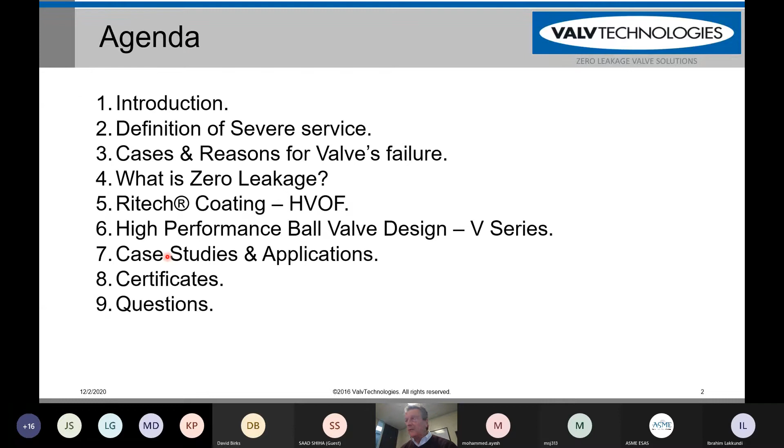You should be seeing the introduction of the agenda, where we're going to be talking about zero leakage and severe service applications, and give multiple examples, in particular on scraper traps and molecular sieve. We have many different applications that we use our valves for. So if you don't remember anything else from this presentation, remember this: ValvTechnologies manufactures only metal-to-metal seated valves.

We don't manufacture soft seated valves. We only manufacture valves that are used for severe service applications, 100% metal seated and 100% zero leakage, as defined by numerous specifications, which we will get into in just a moment.

So when I talk about severe service applications or critical service applications, what exactly are we talking about? Well, if you're producing oil, gas, and water, oftentimes off the lateral line from the wellhead, you will have a lot of sand or abrasive material inside the pipe that ends up impacting the valves. You can also have highly corrosive services.

If you have any H2S present and it's wet, that makes sulfuric acid, which is very corrosive. If you have CO2 and water, you make carbonic acid. That can also corrode the valves, corrode the pipe, and then the scale inside the pipe ends up going down line and can produce black oxide and other very severe service types of applications.

Also, when you get into very high temperatures, over 800 degrees C or down to cryogenic for liquefaction of methane gas down to -196, when you start getting into very high pressure applications like your API 6A 15,000 PSI or 15K valves. Also thermal shocks, when valves go through low temperatures up to high temperatures down to low temperatures with severe thermal fluctuations within a short period of time, say a minute or 2 minutes, this can make for very severe applications.

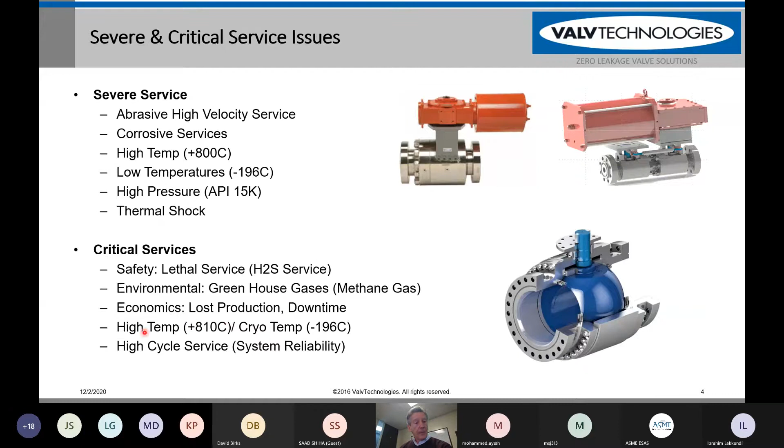If the valves have downtime, you lose your efficiency, you lose your production, you have labor costs, severe temperature swings, and of course, high cycle.

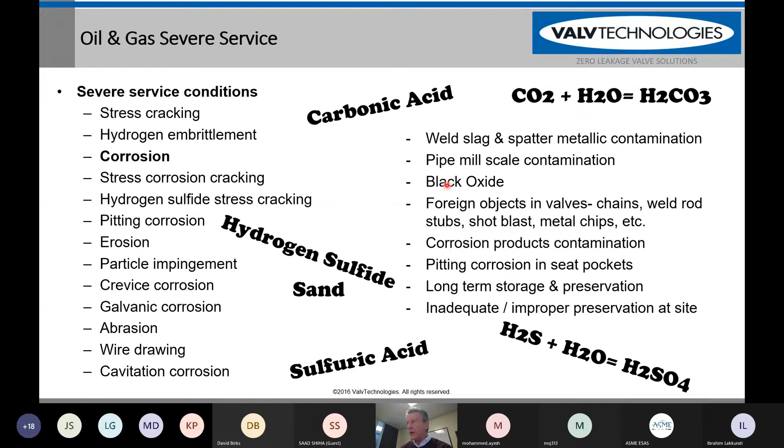So here's a couple of examples of severe service applications that you may be able to relate to. Corrosion, hydrogen embrittlement, abrasion, erosion. You end up getting weld slag splatter contamination, which goes down line and impacts the valves every time you open and close them. Black oxide can be very prevalent in many areas of the world and can be a real challenge for production. Let's take a look at a typical type of severe service application called erosion corrosion.

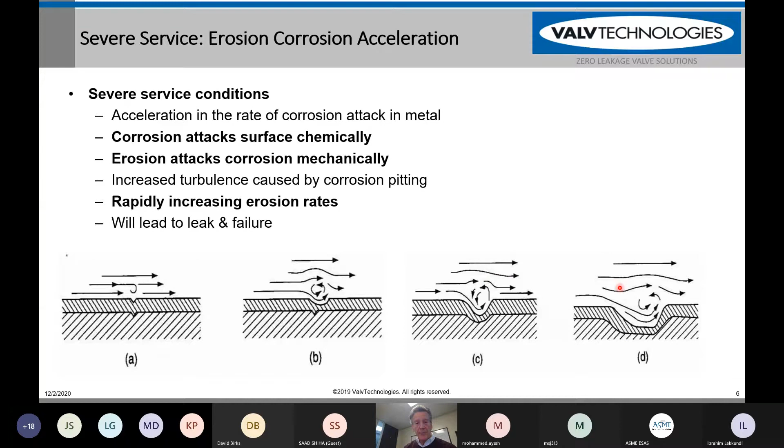Basically, if you have a material and a corrosive environment, the internals of the valve will start to rust and corrode. Then, coupled with that, you have abrasive service. The abrasive service continues to erode away the rust inside the valves and exposes the corrosion to new metal all the time. Over a period of time, this can greatly impact the valve, where you have corrosion and erosion happening at the same time, making for severe pitting in the valve.

When the valve is closed, if you have any kind of debris in between the seats, you can scratch the ball and the seats themselves, and this can lead to leakage. Our experience is that once leakage starts in a valve, whether at the factory during final acceptance test (FAT) or in the field, the valve does not heal itself and the leakage will only get worse.

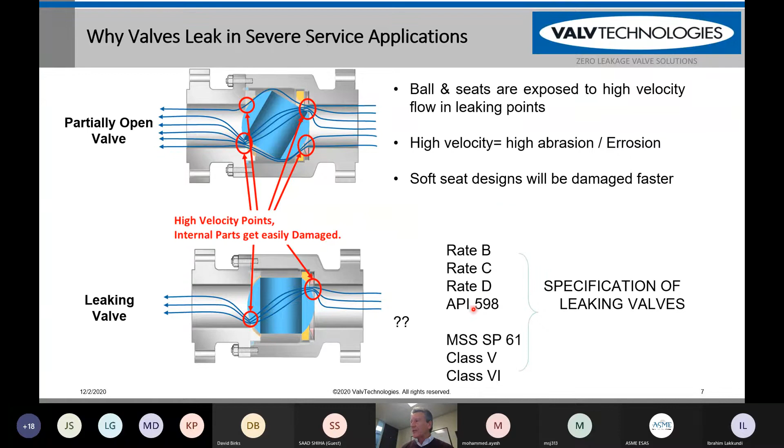These are a number of different specifications and different leak rates that are very common in the oil and gas industry. So the majority of valves work very well.

In the correct service, however, when you start taking valves that are not designed for severe service applications and put them into severe service applications, you can get debris like you can see right here. This is a typical seat for a trunnion mounted ball valve. This is the ball right here. You can see that the seat has a plastic insert, more than likely a grade of nylon.

You also have debris. You have a piston effect on the seat, and you can get debris buildup back behind the seat. Even on metal-to-metal seated trunnion-mounted ball valves, they typically rely on elastomeric seals or thermoplastics to seal. This is black oxide right here, something that probably many of you have experience with. This is the type of debris I'm talking about, sand coated with oil and grease, that can get back up behind the valves.

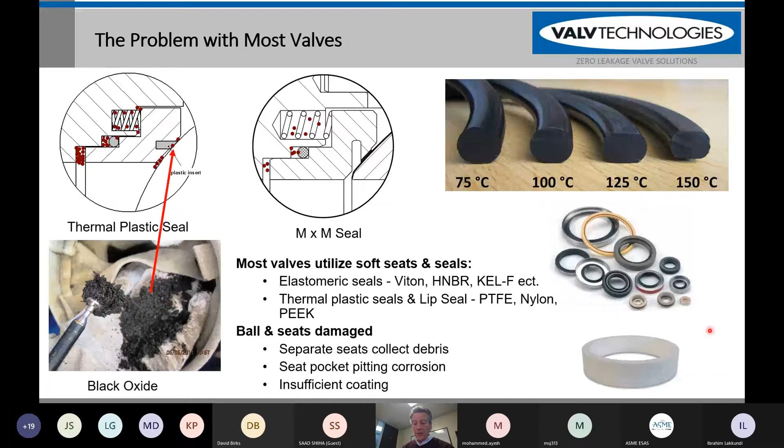Also, elastomeric seals, when they get into higher thermal cycling, you can see here that this is a Viton seal, and you can see how much it deforms as the temperature goes up to 150 degrees C. These are thermoplastic lip seals that, given the right working conditions, work outstandingly well, as shown by this Chevron V packing. But again, when you have severe service applications, all of these types of seals can be damaged.

As an example, let's look at when you're producing a pipeline and welding the pipe joints together. You get weld splatter that goes on the ID, the inside of the pipe. Here is what weld splatter looks like right here. You can see it almost looks like little BBs, small round particles of weld slag that get inside the pipes.

And then when you start to flow or do your hydrostatic testing, this material goes down and gets embedded into the soft-seated valve, which, as you can see right here, weld beads in the valve during startup. Here's a very good picture right here — you can see the little bits of weld bead that are in there. Consequently, as you open and close your valve, you end up scratching the ball itself, as you can see down here.

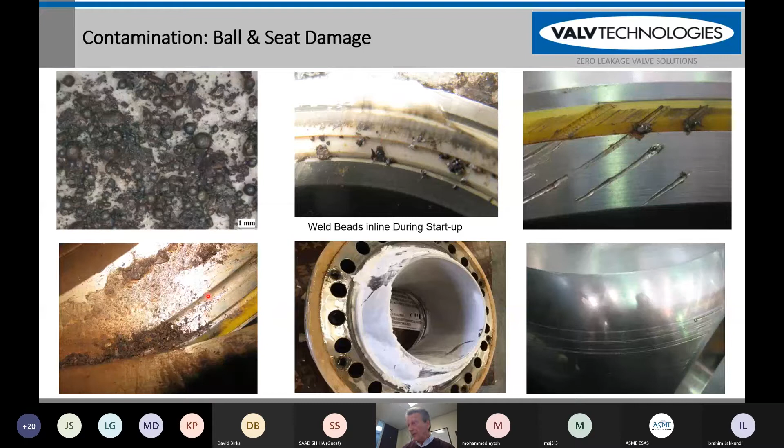Here's a picture of a valve that has debris completely inside of it. And when we took it apart, you can see that the valve will not function properly with that amount of debris inside of it. Here's what a typical brand new ball looks like. Actually, those balls look very beautiful to me. They're LF2 with 1 mil of electroless nickel plating.

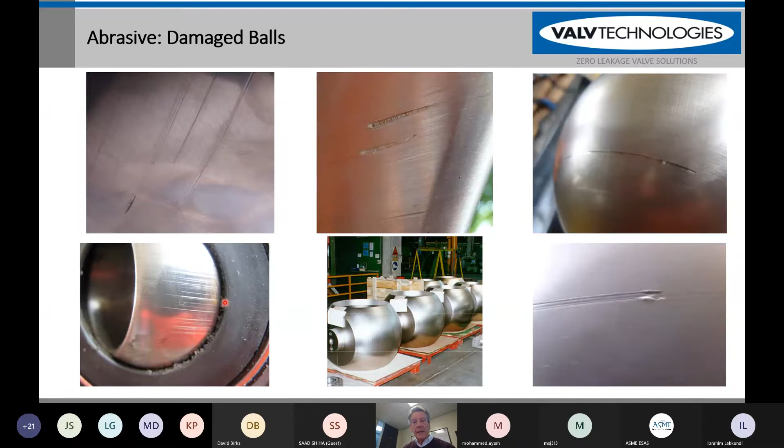But what happens when you have that weld bead and other types of debris inside the valve? As you open and close that valve, you have debris stuck between your seats and your ball, and it will scratch the balls. As the balls scratch, they start to leak. As they leak, then more erosion and corrosion starts to affect the valve and increase the rate of leakage.

This is a table that shows you some typical oil and gas industry standards to measure leak rate and acceptability of a valve at the factory. How much can it leak at the factory and still be okay? Here's a couple of very typical examples. Your ISO 5208 is referenced in API 6D, and you can see that it has acceptable leak rates for metal-to-metal seated valves.

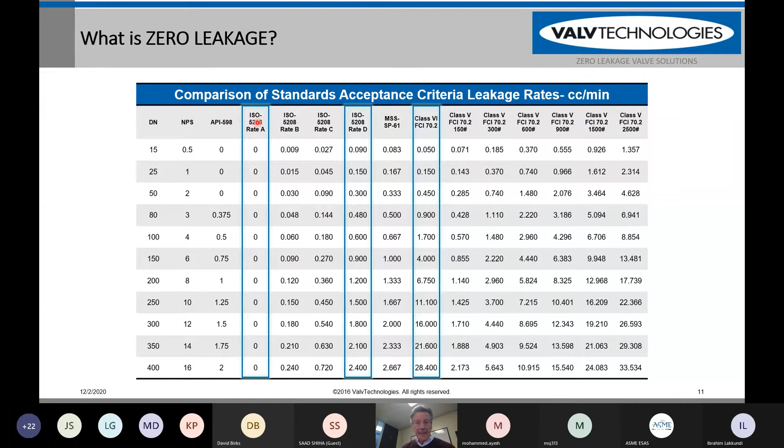The leak rate that we always use is leak rate A on our metal-to-metal seated valves, which is exactly zero leakage. Again, to show you in a graphic form, here's a number of different industry standards for when manufacturers are shipping their valves from the factory. They must meet these standards. If your standard is FCI 70.2, you can see that the leak rates on a 16-inch valve can become quite severe.

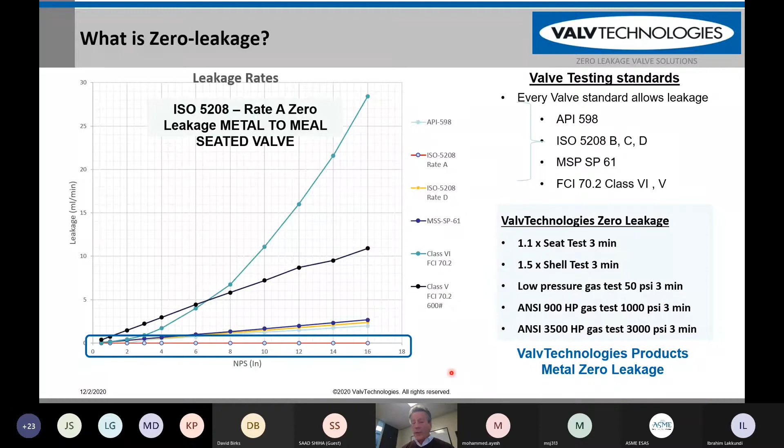ValvTechnologies leak rate is always the same. We utilize ISO 5208 as referenced by API 6D, and we utilize leak rate A. Here's some of the times and pressures that are called out. We manufacture our valves up to 42-inch in diameter. Here's an example of a test which has been third-party witnessed by Bureau Veritas.

In this test, a major oil company in Latin America, a national oil company, came up with a procedure to test valve durability in severe service application. They had us fill and make the valve full of 40% sand and 60% Vaseline. We packed the valve with that, and then we started performing cycle testing on it while the valve was under pressure. First, we did 10 cycles to see if it would hold.

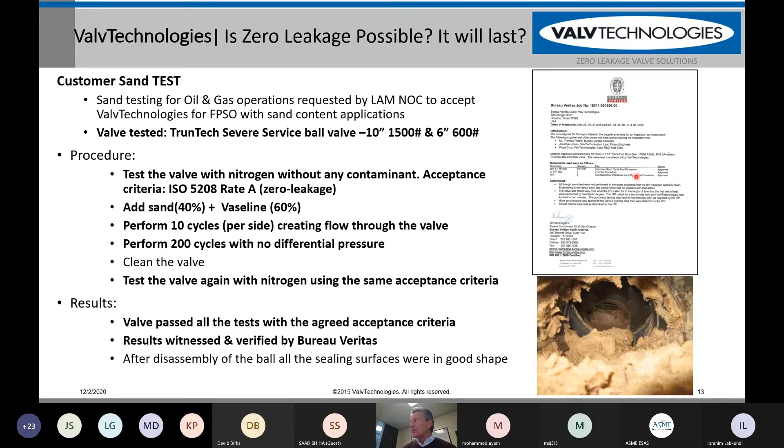It held fine, and then we tested it. Then we did 200 cycles with no differential pressure, and then cleaned the valve and tested it again with nitrogen gas. The valve held both the shell test and the seat test with zero leakage. This certificate is available for anybody that would be interested.

Here are some of ValvTechnologies valves that have been in service in different severe service applications for a period of time. You can see this valve right here was used as a HIPPS valve. It's an API 6A valve, and it was in service for 12 years. After disassembly, after a shutdown, the inside of the valve still looks perfect.

Here's one of our balls that has been also in 6A HIPPS service for 14 years. And although there's a lot of debris, the valve has special construction and is coated with TCC, tungsten carbide coating, or chrome carbide coating, and the seating area is still beautiful. Although there's slight discoloration on this valve, it's another 6A valve. It was in service for 14 years and has no leakage at all.

Again, more seats. This is 8 years in molecular sieve service. The seat has tungsten carbide coating on it, which makes it impervious to the weld slag and weld beads. Here's a ball inside the valve when we first took the closure off. Again, another valve, this one was in coker service in a refinery, very high temperature, for 8 years with no consequences at all. This is one that was in service up in Canada for 8 years, and no problems with it at all.

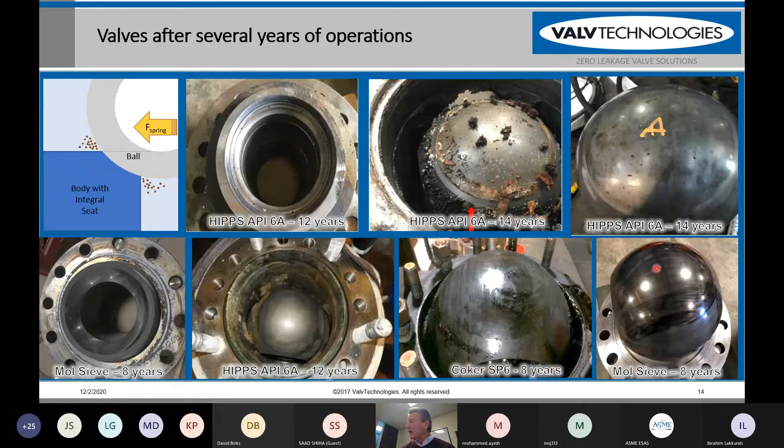Here's another test report. This again is third-party witnessed at our facility. Our main facility is in Houston, Texas, and I extend an invitation to anyone, whenever everyone can start traveling again. If you happen to be in Houston, it'd be our pleasure to have you visit us at our facility, and we can show you firsthand.

So in this test right here, we had a 30-inch, 300-pound class valve. Remember, I said that our valves go all the way up through 42-inch in diameter. This is in a coker application in a refinery. We had third-party inspection. After 4 years of service, we took the valve out of service. You can see the valve right here. This is a schematic of the valve.

And you can see that we performed testing with the acceptance criteria of ISO 5208 leak rate A. With nitrogen testing at low pressure, 20 psi, after 4 years of coker service, the valve still is bubble tight, zero leakage. We then increased the pressure to 80 psi, and the valve held just fine. Those results you probably can't see, but again, we'd be happy to provide you with a copy of this. You can see the third-party witnessing and that there was zero leakage.

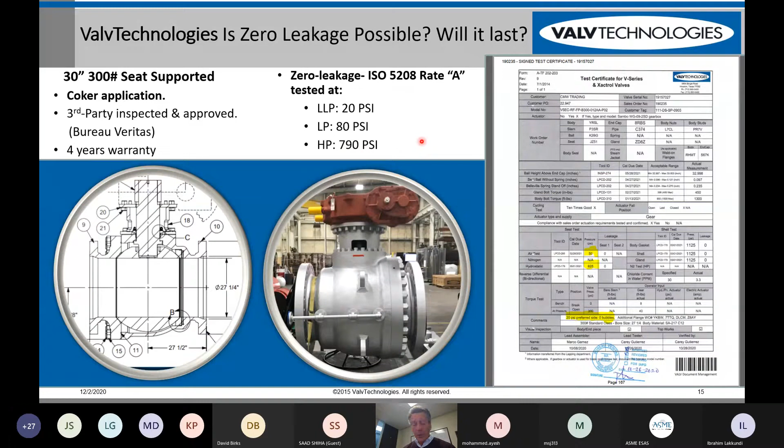We then did a high-pressure seat test on it at 790 psi. Again, the valve held perfectly.

How is it that we're able to manufacture valves? What makes our valve unique in terms of being able to handle severe service? Well, we typically do not use elastomeric or thermoplastic seals in our valves.

You can see right here, this is one of the processes that we specialize in. It has taken us 20 years to perfect this. We have 4 HVOF booths. HVOF stands for high velocity oxy fuel, and it's how we coat our balls and seats and inside of the valves, inside of the balls with tungsten carbide or chrome carbide coating.

The HVOF, high velocity oxy fuel, is applied at very high temperatures. You can see here, over 3,000 degrees C. That's greater than 6,000 degrees F. That's how hot the flame is right there.

The 4 booths that we have and all TCC coating that we do is proprietary to ValvTechnology, and we do it all in-house - the application, the grinding, and the lapping of the balls and seats. It's also applied at an extremely high velocity. You can see here, it's almost applied at 5,000 miles per hour. That's incredibly fast.

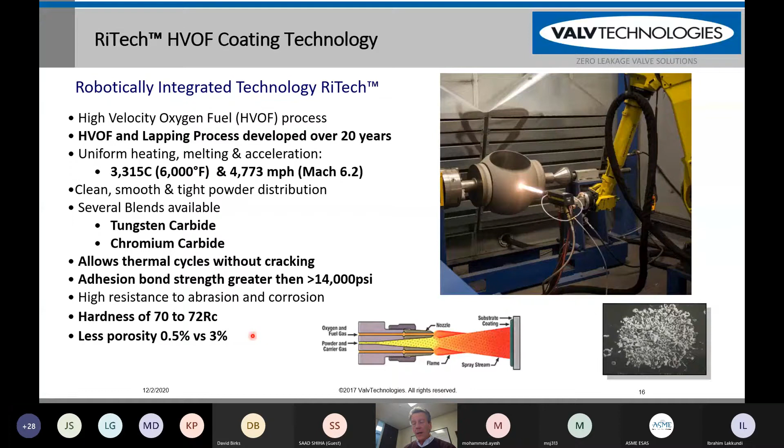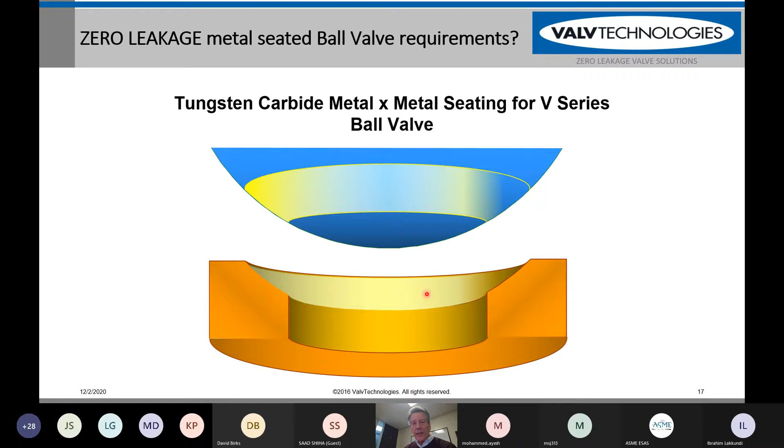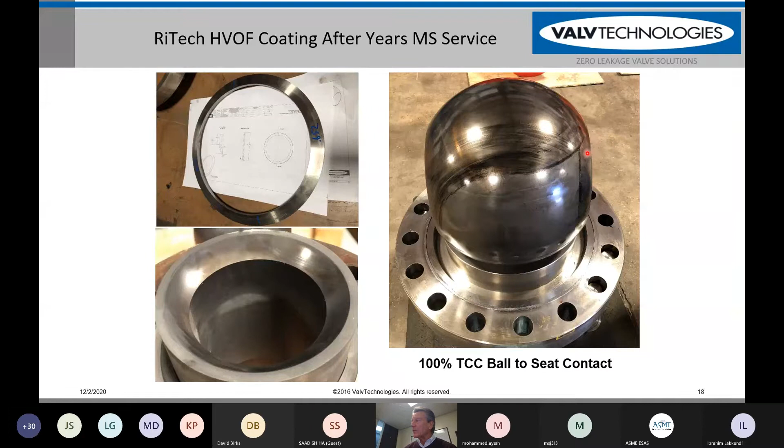In the open position, we still maintain full contact between the ball and the seat. And you can see that evident right here where there's a slight amount of residue left over on the ball of oil. What are some of the things that maybe you need to be aware of? All tungsten carbide coating and chrome carbide coating is not created equal.

Many end users, when you specify metal-to-metal seated valves, will put tungsten carbide coating on the ball and only a small strip of the ball, and then on the seating area of the seat. That way, when the valve is in the closed position, they can honestly say that the valve is metal-to-metal seated. We don't believe that thin band tungsten carbide is adequate to give you long field life in the types of severe services that our valves operate on a routine basis.

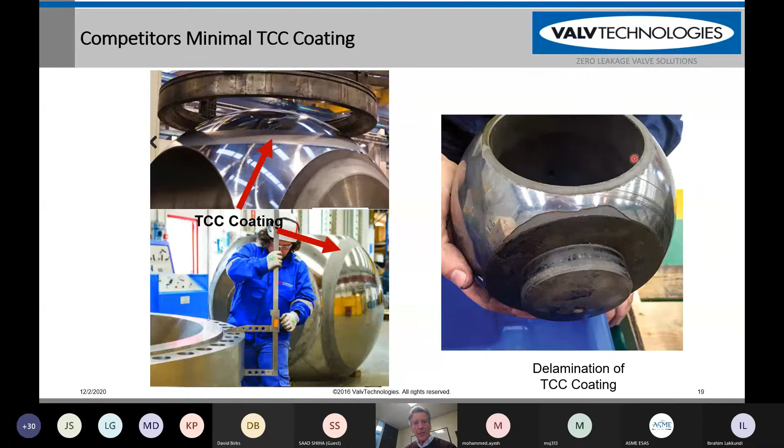Another issue that your valves can have is what's known as delamination. You can see here that the tungsten carbide looks very, very good, but it's delaminated around the seat and around the ball. So that valve will leak.

ValvTechnologies manufactures 3 basic valves. One is called our V series. This is a seat-supported valve, typically used in slurry pipelines, as well as scraper trap receivers, launchers, and many different applications. It does not utilize any thermoplastics or elastomeric seals.

We also manufacture a Truntech. This valve is what we use for our API valves all the way up through 15,000 PSI and 42 inches in diameter. And then this is our NexTech valve. The NexTech valve comes off the shelf, ready to put into services of upwards of 800 degrees C, or 1500 degrees Fahrenheit. Applications typical for this valve would be superheated steam applications for steam injection, steam floods, or perhaps power plants where you're doing a boiler feed.

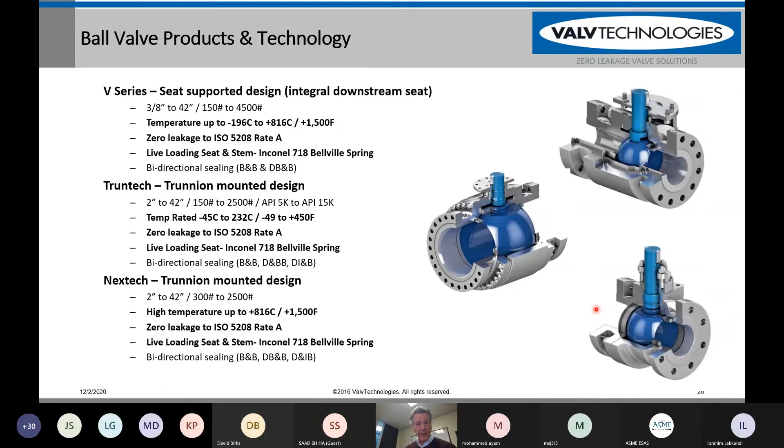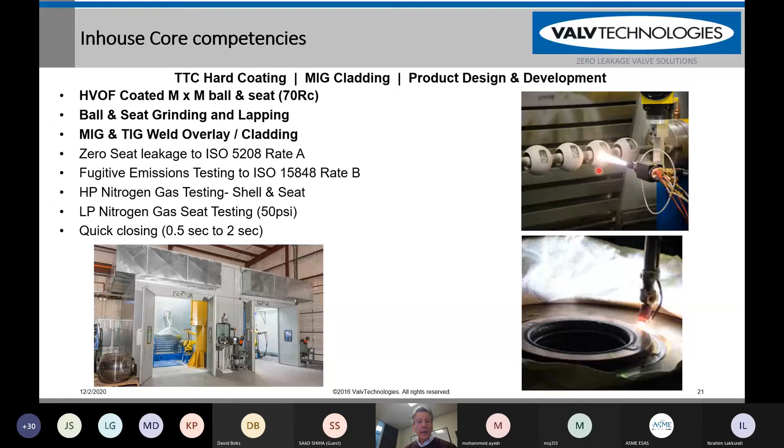ValvTechnologies has a number of core competencies in-house. Here are 2 of our HVOF booths that we apply the tungsten carbide and chrome carbide, as you can see right here. Also, we specialize in MIG and TIG welding. MIG welding is metal inert gas. TIG welding is called tungsten inert gas.

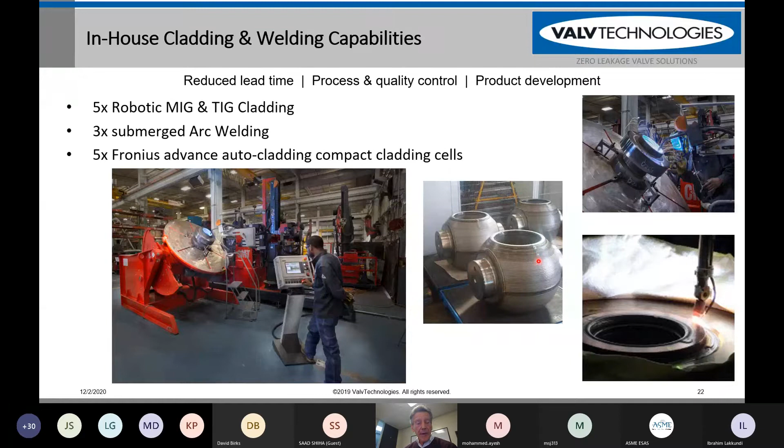We have 5 robotic booths. You can see run right here where the operator is applying Inconel 625. Here's some balls that have had Inconel 625 applied to them. They'll then be machined, and then on top of the Inconel 625, we will apply our tungsten carbide.

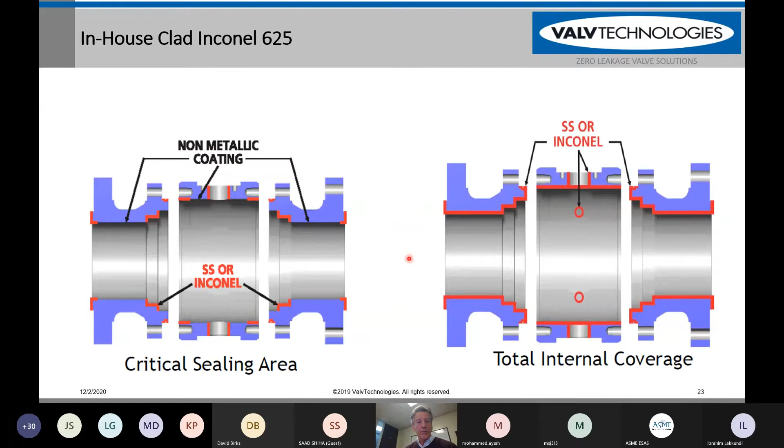For cladding purposes, we can do cladding of either only the dynamic and static sealing areas, such as the seat pockets, stem and trunnion journals, or we can do all wetted parts. This can be a good economic solution to give you the corrosion resistance that you're looking for and have a valve that is more economical.

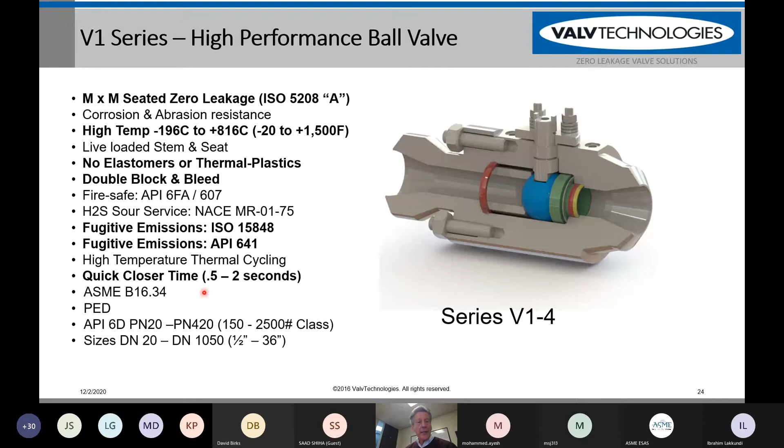It does not utilize any thermoplastics or elastomeric seals. It is bidirectional and double block and bleed. Meets all industry standards for fire safe, NACE for H2S service. Also meets all the industry standards for fugitive emissions, as all of our valves do. And because of the low porosity that we have on the contact between the tungsten carbide on the ball and seating areas, we're able to open and close our valves very, very quickly. All of our valves also are SIL 3 and SIL 4 certified.

You can see this is a cutaway of the V series right here. As I said, it's bidirectional, double block and bleed. Here's a depiction of our ball and seat for the high pressure side of the valve. This is a self-relieving seat, so pressure comes from the upstream side, and the upstream seat is pushed into the ball. So we have constant contact between the ball and the seats.

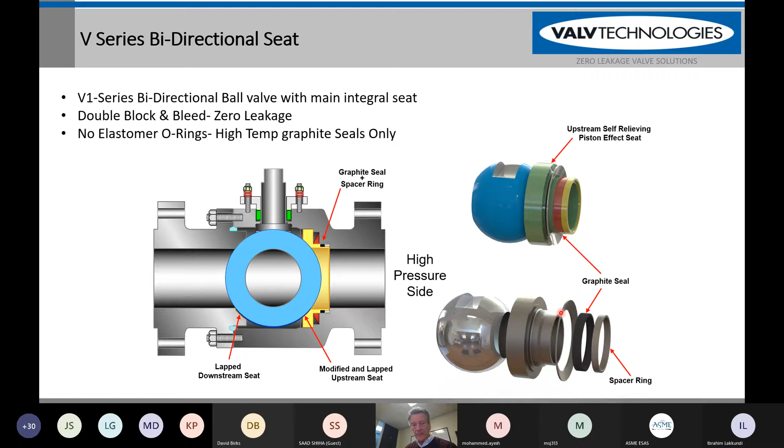Here is the Belleville Washer right here, which acts as a very powerful spring. That Inconel Belleville Washer is made out of Inconel 718. Again, here is a depiction of the V series. This is your high pressure side. You can see the Belleville Washer, and it's loading this seat onto the ball.

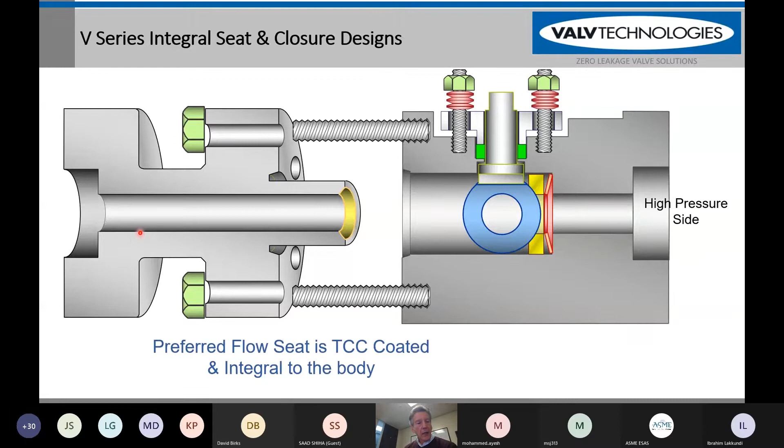On the downstream side, it's very unique. We do not have a seat insert, but we have an integral closure and seat, which makes for outstanding field performance. So when we assemble the valve, this is a picture of the Belleville Washer made out of Inconel 718.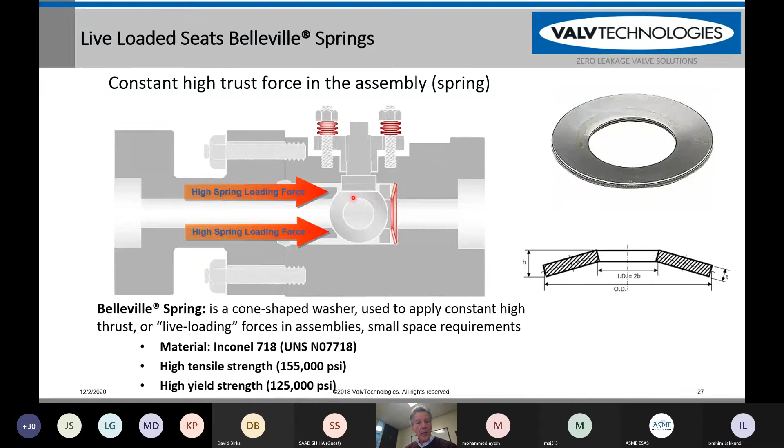It's an extremely strong, extremely durable spring that we utilize, and it has upwards of 155,000 PSI tensile strength, which is very, very high. For instance, if it was made out of 316 stainless steel, it'd be somewhere about 35,000 PSI. So it's very, very strong, and you can see when we load it, it puts a load on the ball and the seats, and this is kept in constant tension.

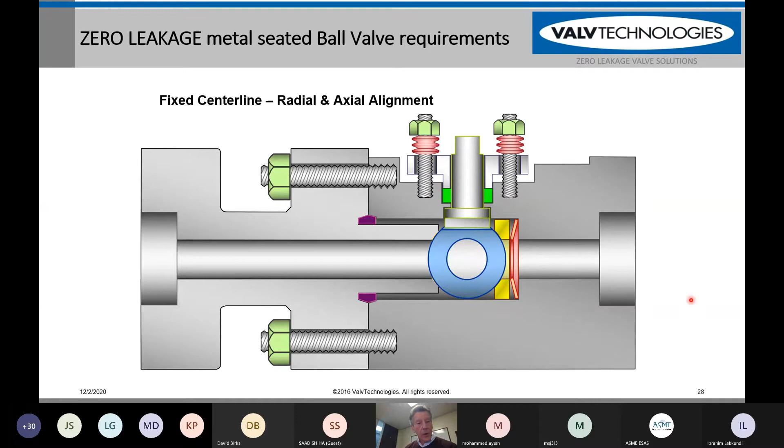We have always complete radial and axial alignment of our ball. We hold very, very tight tolerances for all of our valves. And you can see even in the reverse flow, we have bubble tight leakage.

If you ever were to have any kind of leakage up front over a number of years of service, that ball is being pushed by the Belleville Washer, and the HP, the high pressure coming in from the upstream side, pushes that ball into that downstream seat. We have that contact area right here between the ball and the seat, where you have constant contact of the TCC, tungsten carbide coating, or chrome carbide coating. This is an integral downstream seat and gives us zero leakage.

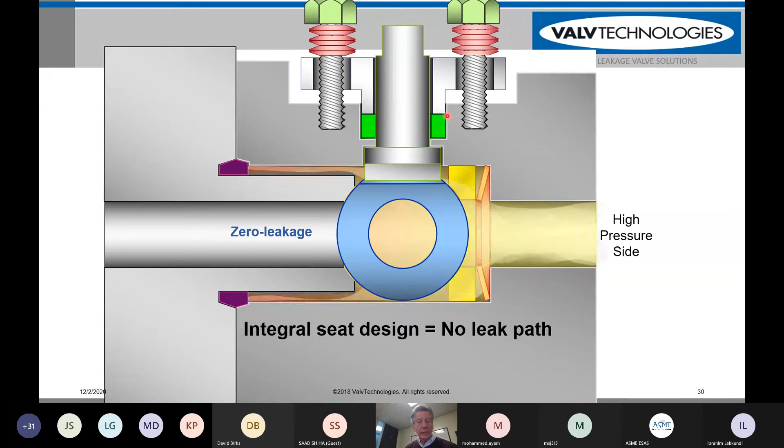You can also see at the top here, these red discs are Belleville washers, which are stacked and then torqued down to the proper torque. We maintain constant pressure on our packing, so we have no leakage up through the stem bonnet area. And again, our valves have been tested routinely and pass all fugitive emission standards in the industry.

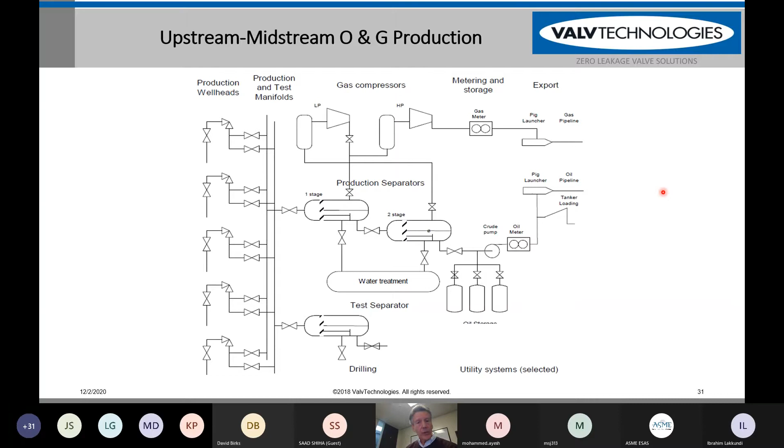The gas, if you're producing high gas content, oftentimes you'll have a molecular sieve to start cleaning up your gas. The first thing that you want to do is to remove any water from the gas. If you have any H2S in the gas with water and methane, you're going to have issues because that produces sulfuric acid. After production, typically you will have a pig launcher and a pipeline that will produce and move your high pressure gas down into perhaps a liquefaction LNG facility. And then for the oil, it will be sent downstream to storage tanks or onto tankers.

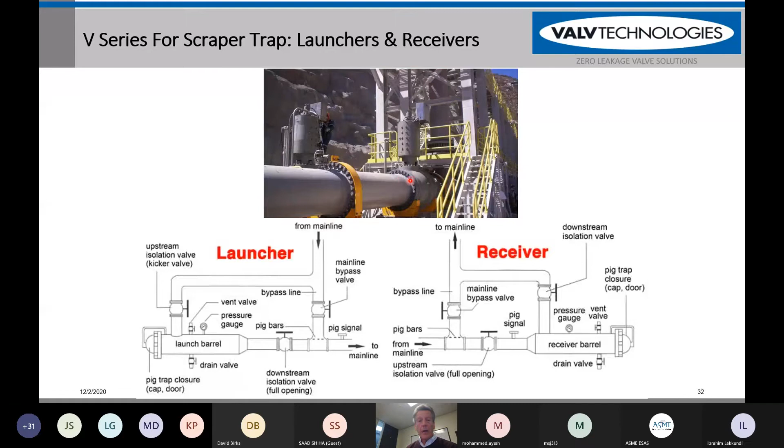You can see a slurry pipeline right here where we have different valves from ValvTechnologies with a hydraulic rotary vane actuator. Typically, we are utilizing our valves in high slurry applications for pipeline. A good example of that would be a pig launcher right here. This is your scraper receiver.

You have a trunnion mounted ball valve right here with a spring return pneumatic actuator. This is one of the scrapers that is sent down through the pipeline. Its purpose is to push any debris or condensate that might be in that line down where you can take it out of the scraper trap.

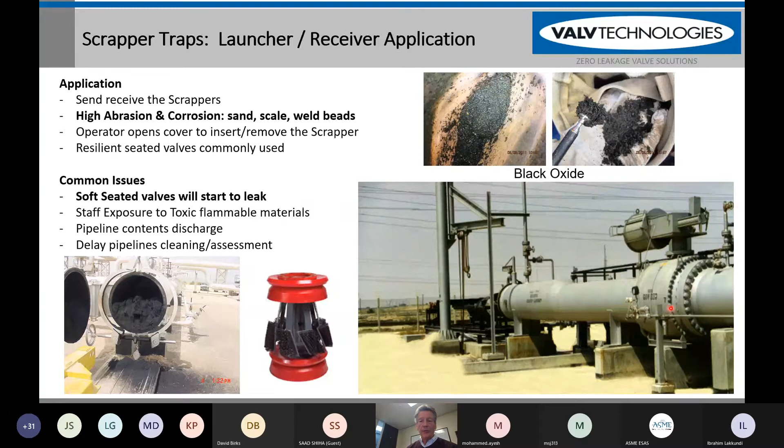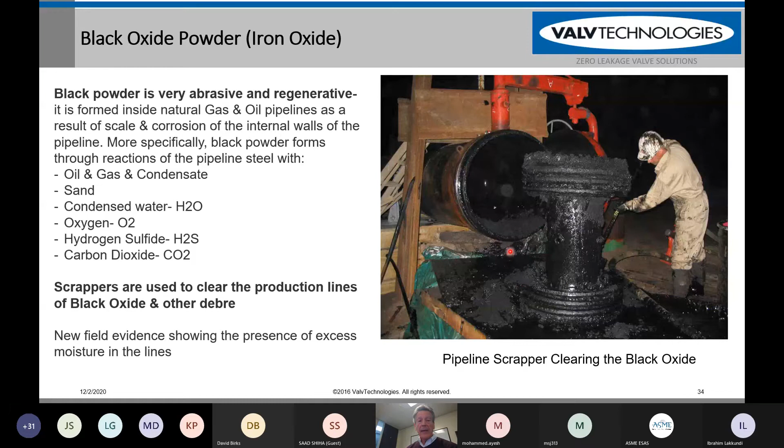You can see here a pig receiver that's been opened, and it has a lot of black oxide mixed with high viscosity oil. When black powder or black oxide is a result of oil and gas condensate mixing with sand, and then the rust, which is and scale, which is forming inside of the pipeline, especially if you have any amount of water that can condense inside the pipeline. That water mixes with the oxygen, the hydrogen sulfide, and the CO2, and it forms that black oxide. That black oxide is very, very abrasive.

So again, here are some examples of the black oxide and different receivers, scrapers coming out. So that's what is filling up your valve right there, and which is oftentimes leading to valve failures in these critical applications.

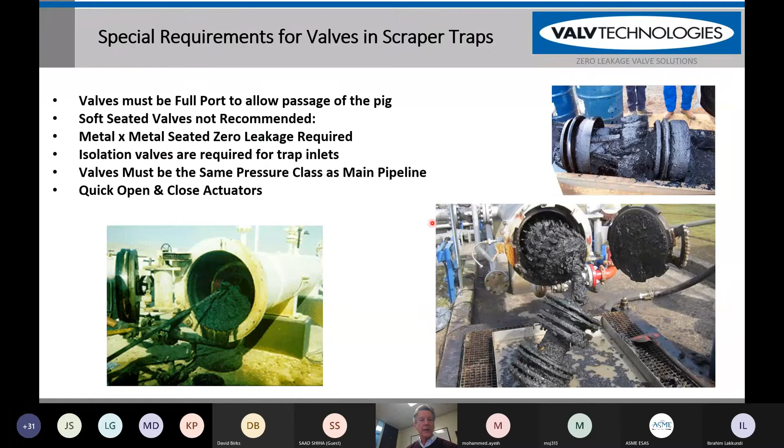So we recommend that you always use a full open through conduit valve that is the same ID as the pipe, so that you have smooth transition of the scraper into the scraper trap and through your valves. We do not recommend that you use soft seated valves. We recommend that you would always use a metal to metal seated valve that can have long field life.

Here's an example of a number of our V-series valves that we were just talking about with rotary vane hydraulic actuators. You can put any type of actuator on our valves, pneumatic, hydraulic, or oil.

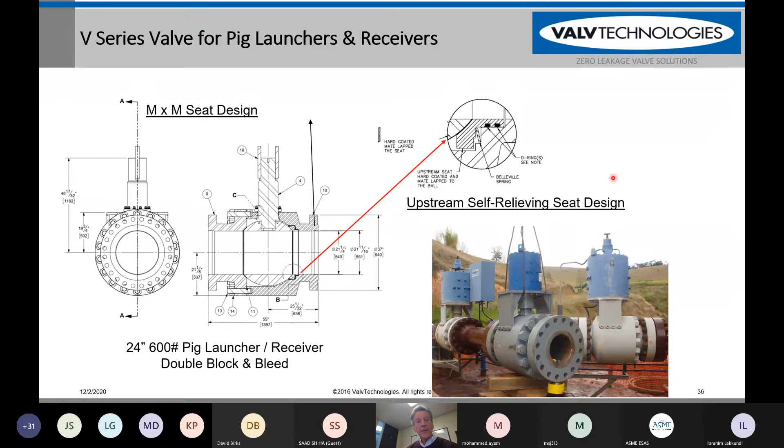This is a picture of our valve, like you can see in the picture right here. This is a 24-inch, 600-pound pig launcher and receiver. It is a double block and bleed valve. Here's some details of the seat design. Again, this is a self-relieving seat, which is pressurized and pushes into the ball due to the upstream pressure.

We've done a lot of case studies and like to work hand in hand to solve problems with our customers, who we greatly value. This is a case study that we did in the Middle East with a very major producer, major oil company, national oil company. This is a 36-inch valve, 300-pound V-series right here. Again, these valves are made up through 42-inch in diameter. These are seat supported, metal to metal seated.

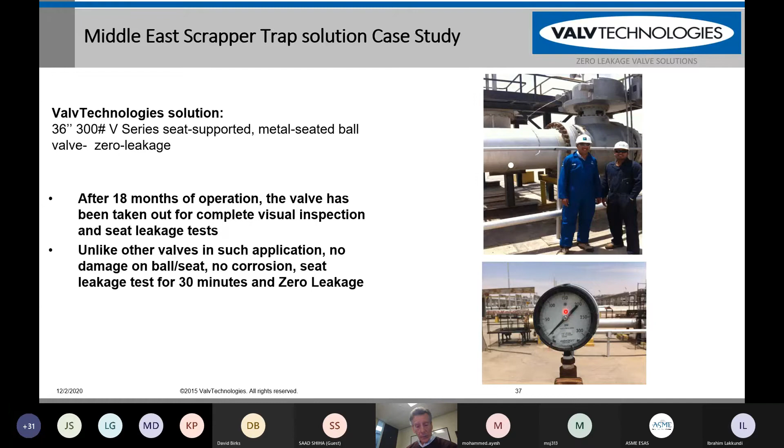This valve was put into service for 18 months of operation, as you can see right here, and then was taken out and was tested. It was held on test for 30 minutes. This is an actual picture of the gauge on the where it's being tested, and it has zero leakage.

Why is zero leakage so important? Well, if you don't have zero leakage, then over a period of time, your valves will cost more and more and will give you less and less efficiency in your field.

You can see here that this is a comparison of end user that we did a case study with. This is 3 pieces of an 18-inch, 2,500-pound class. This is for pig receivers. You can see initially our valve was slightly more expensive than our competitors. Our valve is the blue line.

Our valve went for 4 years with absolutely no problems at all, whereas the competitor's valve needed maintenance and replacement every single year. Due to that maintenance and repair and the leakage, you have much less efficiency, meaning that you are not producing the maximum amount of oil and gas that you would like to be.

You have labor costs, you have downtime, and you have to have additional shutdowns in order to replace these valves. So over time, your total cost of ownership for a valve that works versus a soft-seated valve that does not work and has to have a lot of field maintenance and outages is incredible.

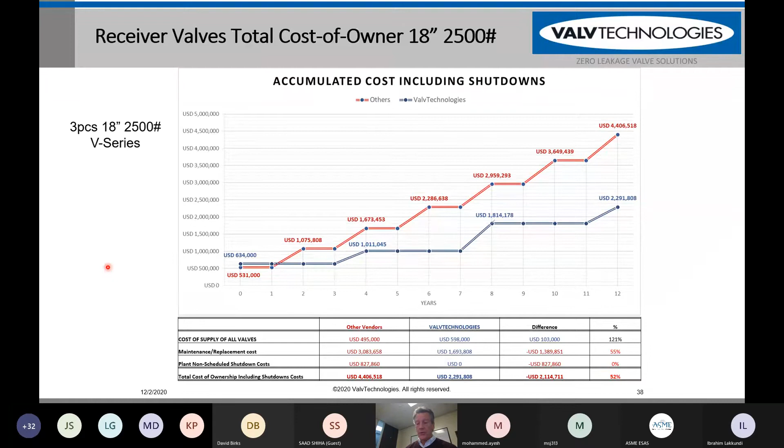You can see here that our valve, after 12 years of service, cost less than half of the amount of our competitor's valve, what this end user was previously using.

Another application for our valves that is very arduous, difficult service is called molecular sieve. This is an overview of your dehydration tanks right here and your gas heater. In a molecular sieve application, it's a dehydration unit, and they utilize each of these drums here, switching from one to the next drum, passing the methane gas through here.

The objective is to remove any water. Again, you want to remove the water because if you have any H2S in your production, the water and the H2S will form carbonic acid and will give you a corrosive environment. You want to knock that H2S out and the water out as quickly as you can.

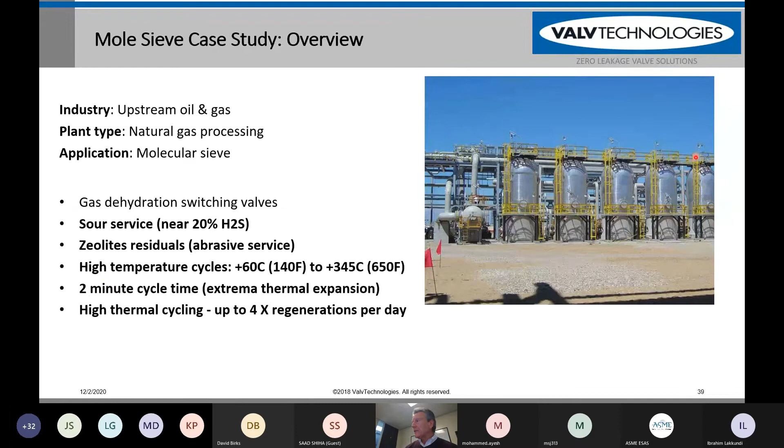So the switching from one drum to another gives you high thermal cycling. There's many valves that are manipulating these drums here. Let's take a look at that. Here's what's really going on.

You have each of one of the valves sees high thermal cycling. You have 3 drums right here. The first drum has the flow of the wet methane gas coming through it, and it's passing through the drum, which is full of zeolite. Zeolite is a desiccant which absorbs the water.

Over a period of time, that zeolite becomes saturated with water. So you have to manipulate the valves and change your production from one drum to the next drum. This drum right here is being dried. You can see your heater here is feeding high temperature gas through the zeolite and drying that zeolite so that it can be producing again.

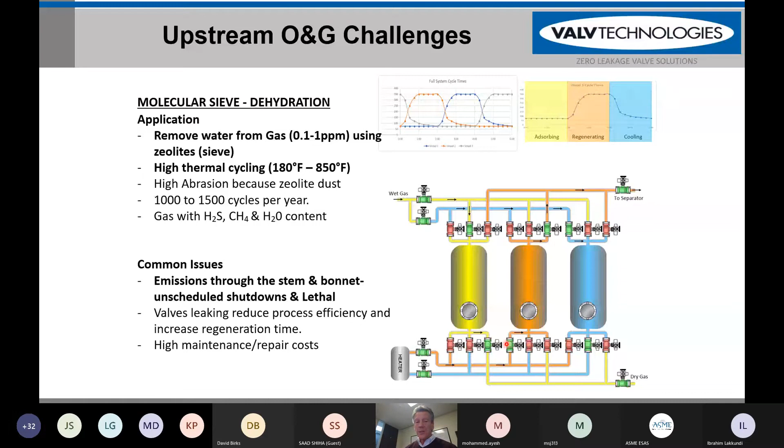After it passes through, the drum needs to cool for a period of time. So you're continuously switching from one drum to the next drum by manipulation of the feed and exit quarter turn ball valves that are right here. This is an area of very arduous, severe service.

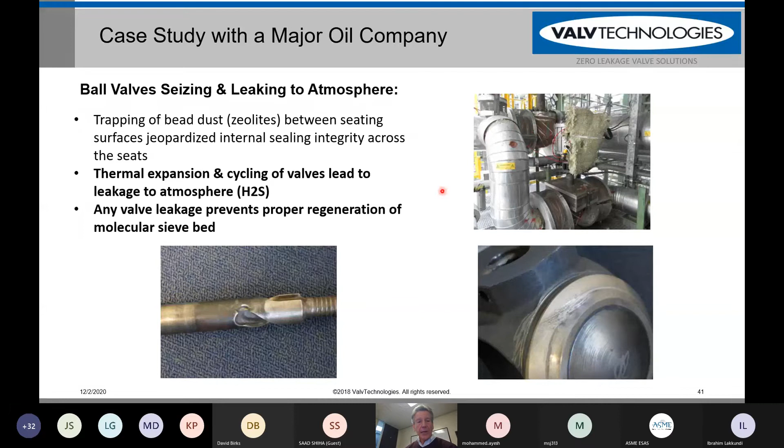So you can see here that this is an actual case study, again, where an end user, a major end user in Kazakhstan, was having a lot of problems with the valves that they were using on this molecular sieve application. The zeolite was getting all up inside the valve, and it caused galling and deformation of the stem and scratching of the seat. Also, you have a bolted bonnet design on this valve that has a different coefficient of expansion than the body. So when the temperature swing happens and the gas passes through this valve, you get severe temperature swings in about 2 minutes time.

So this major oil company came to us after talking to many other end users around the world, and they ordered 15 pieces of 8-inch through 16-inch, 600-pound class through 900-pound class valves. Here's some of those valves right here in our factory.

These were made of solid Inconel with Inconel 718 trim on the inside because they had very severe H2S service. They had 17 to 21, 22% H2S and a lot of sand going through the valves. Downstream of the separator, the gas was passing through these valves, so they put our valves in service.

What they told us was that every time the previous valves were in service, they would only last between 1 and 90 days. And every time the valves would leak, it would end up costing them about $10 to $15 million of lost production. How can that be?

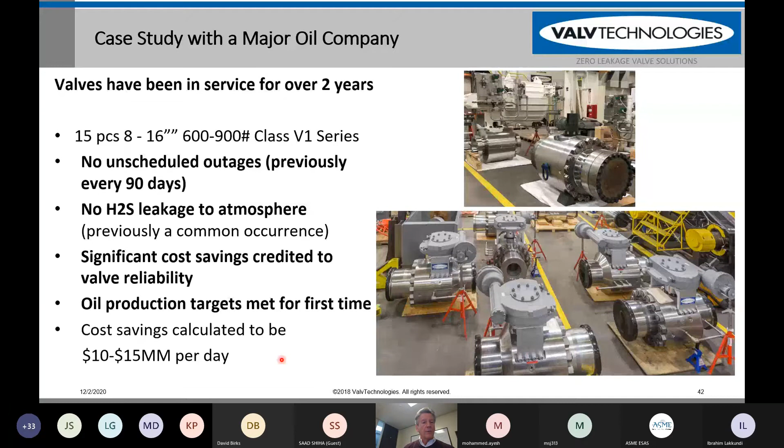Well, when you shut in the molecular sieve, you're shutting in your separator because the gas has nowhere to vent to anymore. When you shut in your separator, you shut in your production manifold, and hence you're shutting in all of your production wells for a portion of the field serviced by that separator and manifold.

Again, what makes the molecular sieve application so arduous and so difficult is that it utilizes zeolite. You can see a picture of it right here. There's rather large balls in there. They have a consistency that is very porous, but also very, very hard.

And they produce a zeolite dust as the methane gas is passing through the molecular sieve application. The balls bump into each other and produce this dust.

So this end user we were working with was having significant downtime and leakage to atmosphere with the 20% H2S, which also made it very, very lethal. That 17 to 20% H2S you can see here.

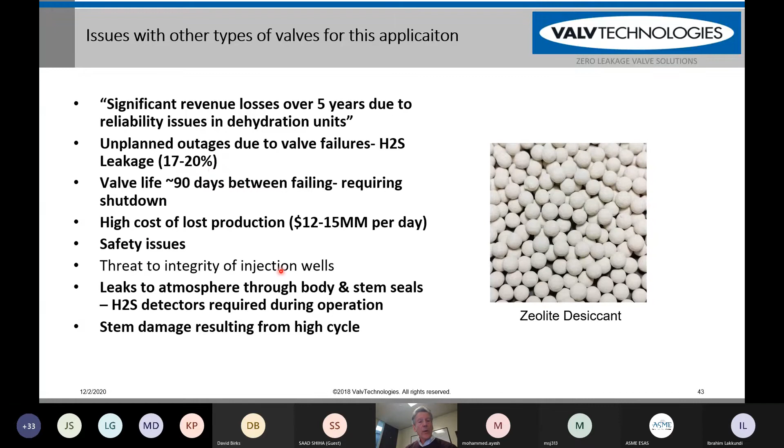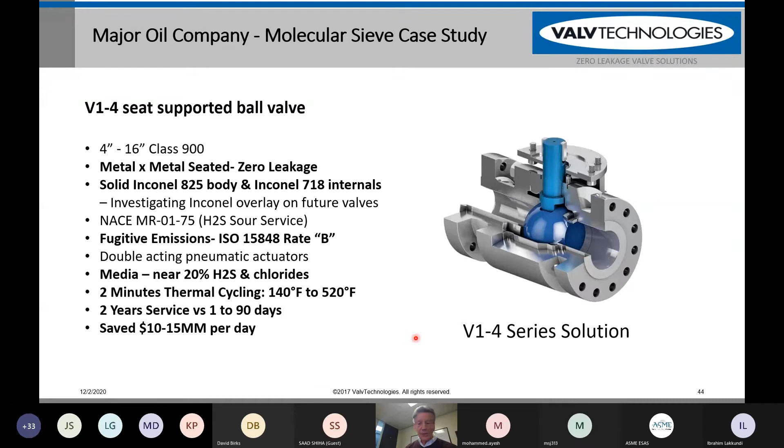So we went ahead and put our valves in service, our V series right here, and they have outages every 2 years. You can see again that the valve was made of Inconel body, Inconel 825, and the internals were Inconel 718, with tungsten carbide coated balls and tungsten carbide coated seats. The valves worked perfectly and lasted through the entire shutdown cycle of 2 years.

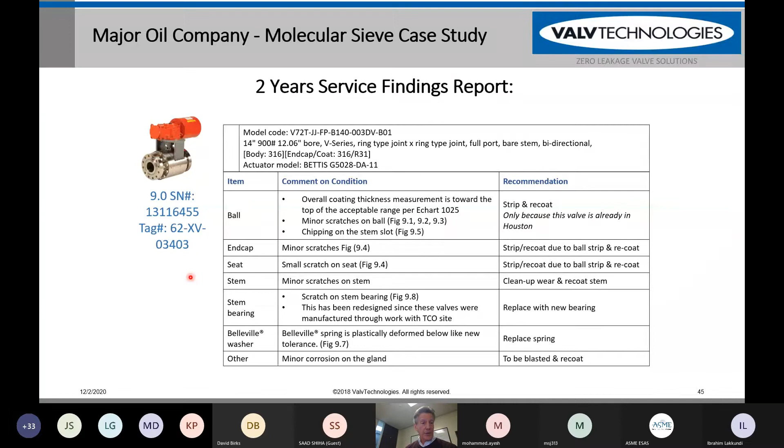The valves were taken out of cycle and sent back to the factory where our customer came to our factory. This is the finding, an excerpt from our joint case study that we did with our end user. This is the actual valve with the serial number and tag number.

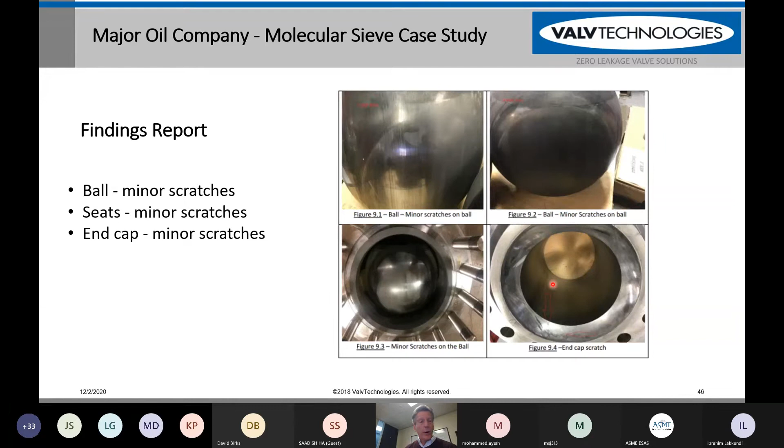After disassembly of the valve, we saw that although there was slight discoloration because of the high temperature swings, there was no damage or delamination of the tungsten carbide on the seats or the ball. The valve was still working perfectly well.

Here's an example from up in Canada of a 3-inch, 900-pound valve, one of our V series, that was put in service for severe service applications. You can see here that our valve would last 8 years with absolutely zero maintenance on it, and would then be taken out of line.

It would be inspected. Some of the parts would be repaired for whatever needed to happen, and then it would go for another 7 to 8 years.

Our competitors' valves were routinely having to be taken out of line. And you can see here, after the initial 8 years of service, our valve cost less than 5% of the life cycle cost, considering the repair cost, initial cost of the valve, and maintenance.

Downtime, efficiency - if your molecular sieve unit is leaking, then you are not running at full efficiency and you will not be producing as much gas as you could be. If it leaks to atmosphere and has H2S, then you're in a lethal service.

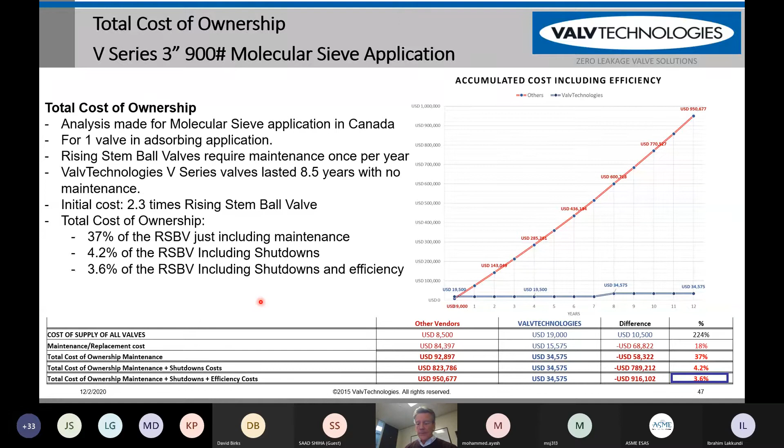Our valves are also used in a lot of other applications in oil and gas. These are our valves in produced water injection, where we have our water gas, and also used in what's known as WAG, water and gas, where they alternate for enhanced oil recovery.

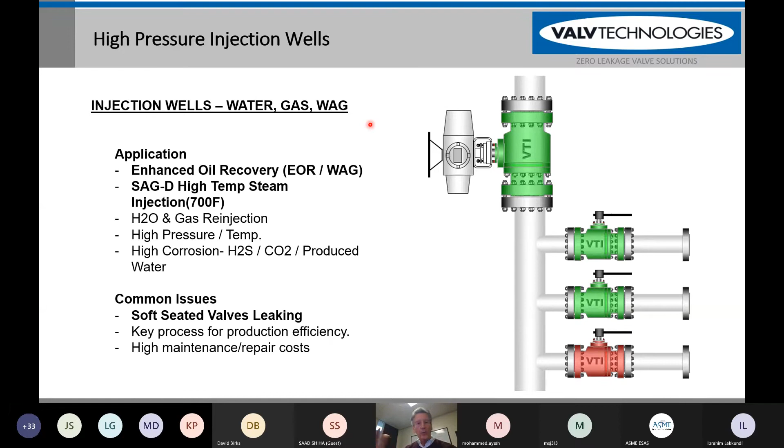You're doing what's called a water flood, where you're injecting water and then you switch and start to inject CO2, then you inject water again. This pushes the CO2, which is wet, forming carbonic acid, and that helps to scrub the formation and give you higher production.

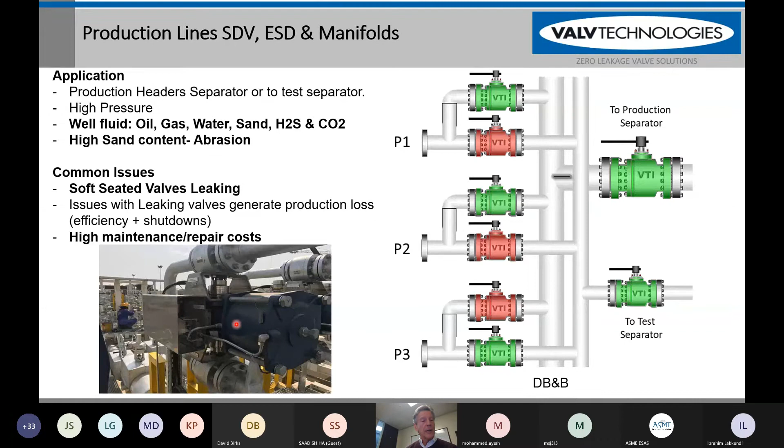So every time that actuator stroked, it would open one valve and close the other. Anytime you had to do a production test through your production test header to see how an individual well was producing, all you had to do was stroke this actuator one time, and it would open and close each valve inversely. That's a very good idea, I think.

Also, oftentimes you get into very severe service where you don't want to have downtime. What we recommend there - API 6D talks about different types of valves that are bidirectional: double isolation, double block and bleed, and double isolation and bleed. The more stringent of those is the double isolation and bleed. We recommend using a twin ball there, which gives outstanding durability, and we manufacture these.

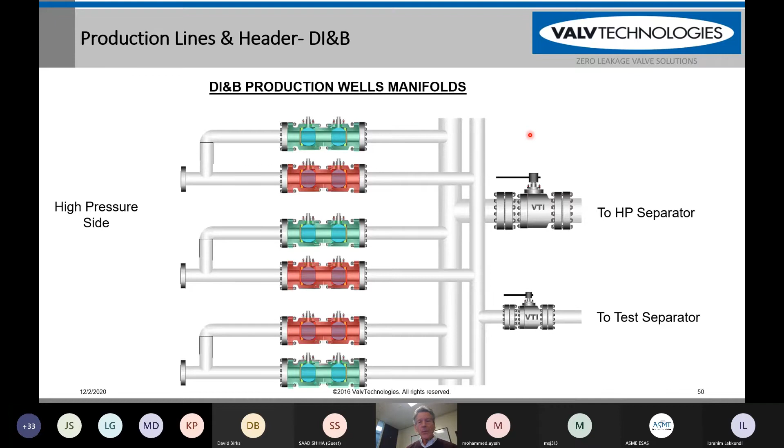After the valve was in service for a period of time, we took the valves out and did a test. Again, we did a very low pressure test at 10 psi gas - the valves held bubble tight. Low pressure, 80 psi - the valves held bubble tight. And then a high pressure test at almost 6,800 psi.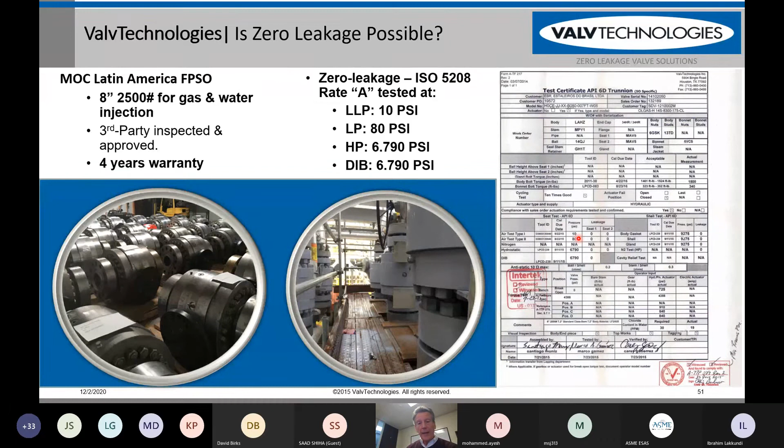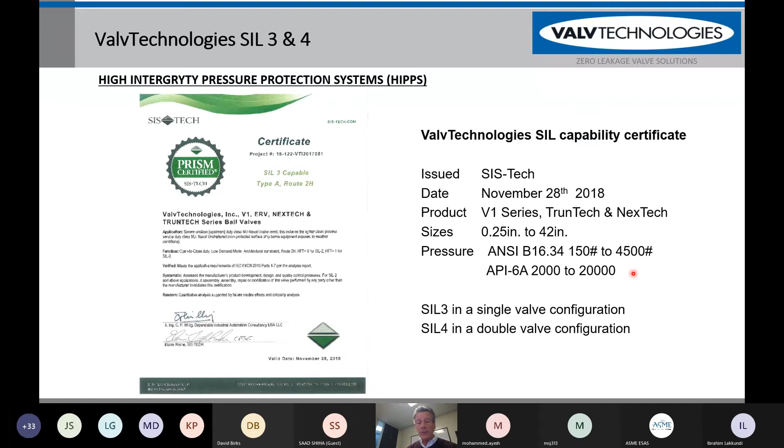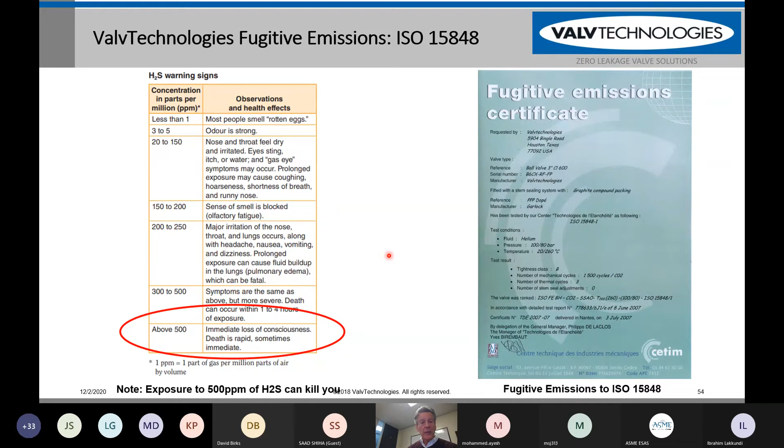I said earlier that our valves are SIL certified to SIL 3 and SIL 4, all the way up to 42 inch diameter, 4,500 pound class, and up to API 6A 20,000 pound class. We maintain all certifications - 6A, 6D, ISO. This is our fugitive emissions certification to ISO 15848, which we pass. Again, you do not want any leakage to atmosphere or fugitive emissions, especially with H2S. 500 parts per million can kill you and is considered very lethal service.

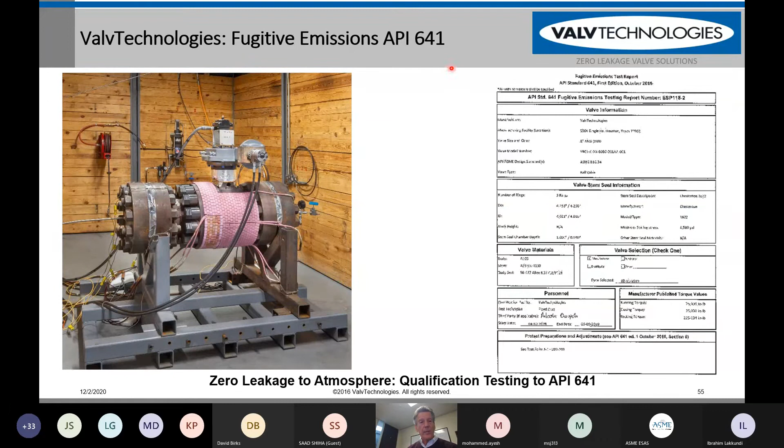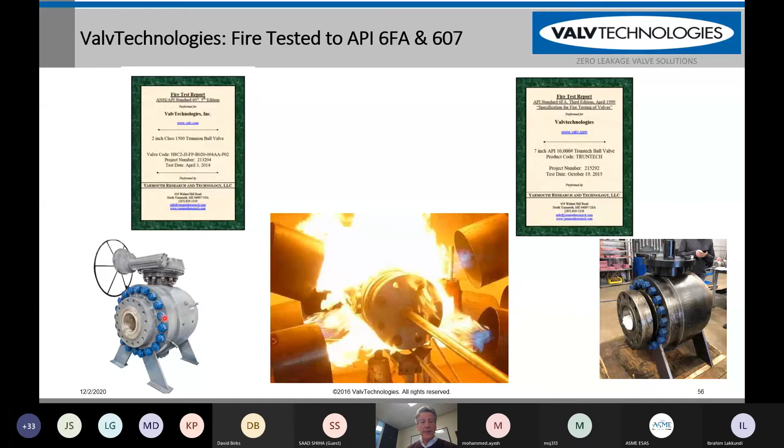Also, API has a fugitive emissions test called API 641. You can see our valve being tested here in our test lab, where they do cycle testing and thermal cycling of the valve. We passed 100% and have a certificate from API who witnessed the test. Fire tested, fire safe - this is a 7 1/16 API 10K valve. You can see how it's nicely painted before the test, and then the valve has been burned, so it has discoloration. This is just a quick summary of a lot of the certifications that we have.

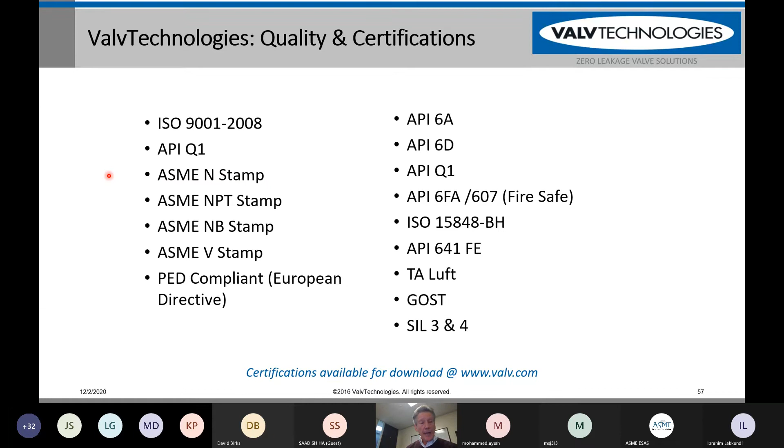One of the certifications we're also proud of is our ASME N stamp. That means we also service the nuclear industry, which has extremely high quality standards. So we maintain our N stamp.

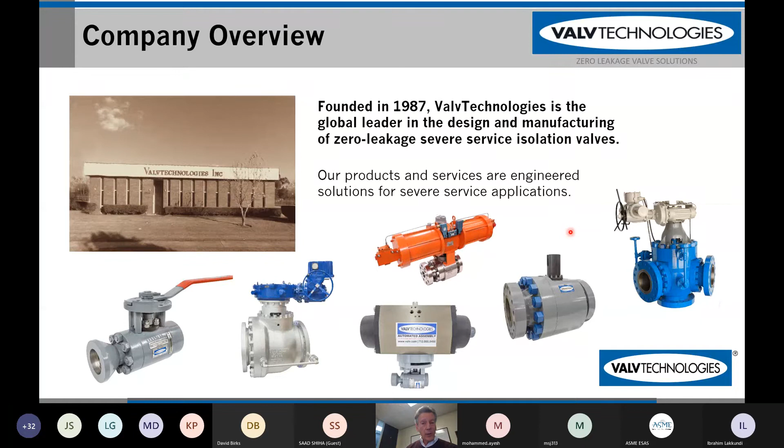ValvTechnologies was founded back in 1987 by Mr. Kevin Hunt, who is still our president of the company right now. This shows you a number of different types of switching valves, and we're happy to talk about other applications we utilize in downstream services, such as hydrocarbon services and coker valves.

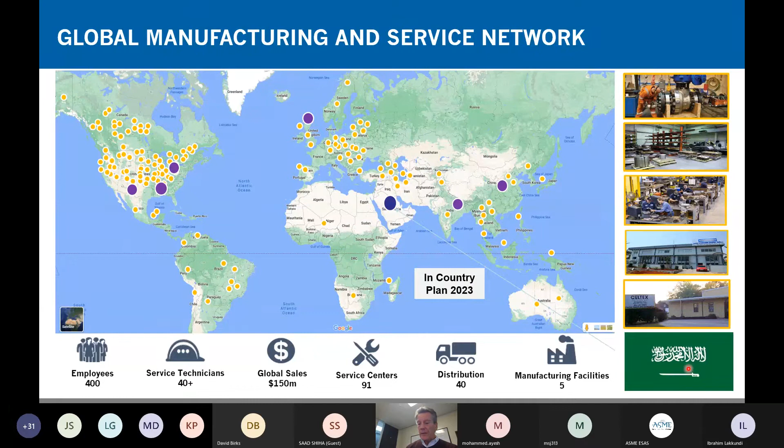These are just some pictures, and it's our ambition going forward. We are currently in discussions with a number of companies that we're looking at partnering with, where we would very much like to come in and give our support within the Kingdom with valve manufacturing and valve repair. As I said earlier, our valves go into many different applications, and we have a very large service department.

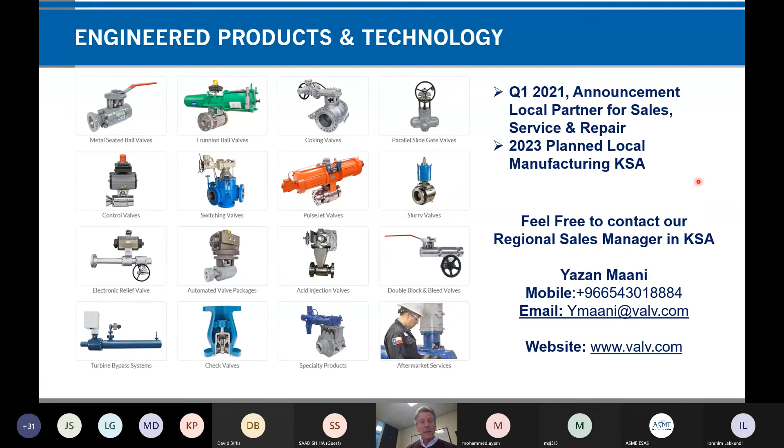And hopefully I haven't gone too long. And with that, I'm going to...